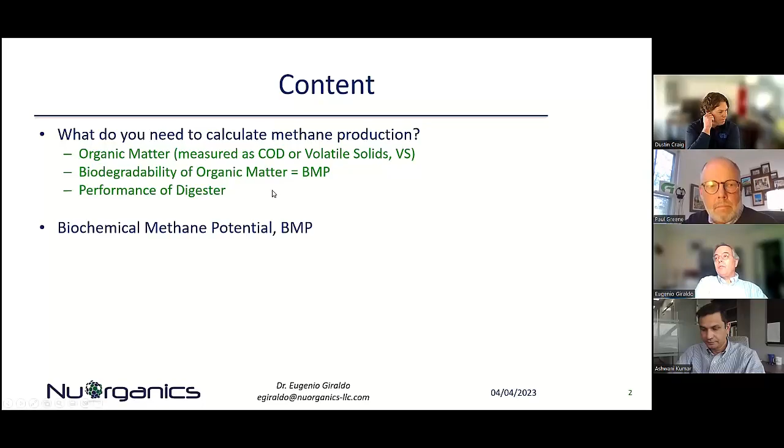You actually need three things: quantification of how much organic matter you have, usually measured as COD or volatile solids; how biodegradable that organic matter is, usually measured as biochemical methane potential, or BMP; and what's the performance of your digester. We'll go over the biochemical methane potential and how we can use it to forecast production, the toxicity assay that's intimately linked to the BMP, and some examples.

The key is to measure that first part, the organic matter, usually through COD or volatile solids. COD has an advantage because there's a perfect link between the amount of methane you produce and the COD that is removed. COD is usually expressed in units of oxygen demand—grams of COD per liter of waste, grams of oxygen per liter, or on a mass basis, grams of oxygen per ton, sometimes called grams of COD per ton. If it's fully degraded, you end up with about 90 to 95% methane and some leftover biomass that grew out of that COD.

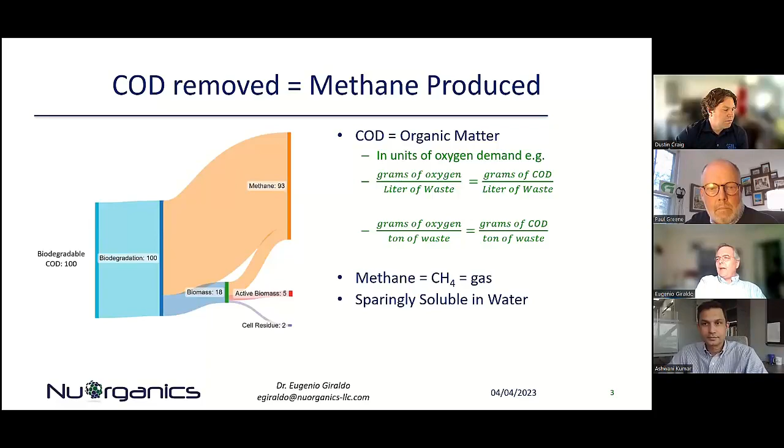Methane is a gas and is marginally soluble in water, so in the digester it bubbles out of the water as biogas—that's how the COD is removed. The interesting part with COD is that you have a very well-defined number: every gram of COD removed produces 0.35 liters of methane, at standard temperature and pressure of 1 bar and 0 degrees centigrade. This is important to understand because since it's a gas, you need to specify pressures and temperatures.

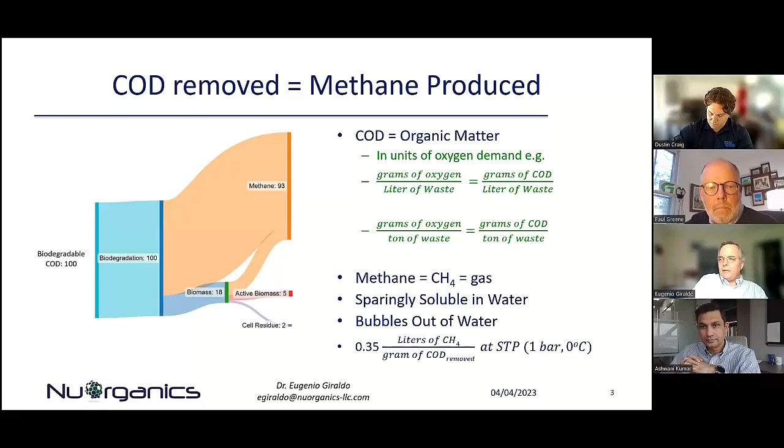The biochemical methane potential basically measures the second part, the anaerobic biodegradability, based on measuring the amount of methane produced linked to the organic matter degraded. It's a test developed at Stanford University originally around the 1970s. This is the classic paper in the industry describing how to conduct a BMP. Later, ASTM took that same technique and, with the experience of many practitioners, put together an ASTM test method actually called anaerobic biodegradation potential, which clearly links the importance of BMP to defining how biodegradable that organic matter is.

It's conducted under strict anaerobic conditions, not limited by nutrients—you add all the nutrients the microorganisms might need. It's not about toxicity; if there is toxicity, you have to relieve it or run the test for a long period until the toxicity is handled. All of this is spelled out in both test methods. It's under pH control conditions, so pH is tightly regulated and you don't have the pH issues you usually have in digesters. It's temperature controlled, giving a very stable environment for the microorganisms, and you use a broad spectrum inoculum, meaning organisms able to degrade your substrate, obtained through strict procedures.

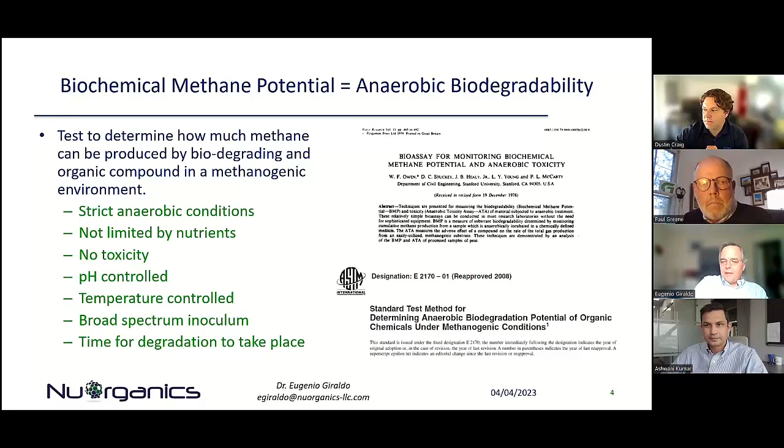This is how you conduct it. You first start by making the conditions anaerobic. These are usually what we call serum bottles, about 250 milliliters. You flush the head space to remove any oxygen, using a gas specified between 50 to 70% carbon dioxide to nitrogen. And then you close it after you flush all the head space to remove the oxygen.

You incubate it, and usually it doesn't call for mixing, but it is better to mix under temperature control conditions. Then you measure the amount of biogas that you produce. The original test called for a syringe, and you pull out that biogas, then calculate the amount of methane that is in it, and plot that over time. This is the original test method.

These days you have at least 2 or 3 different manufacturers that provide automatic measurement of biogas production, and here's one example of them, so you don't have to do it manually. What you obtain is a plot of incubation time versus the amount of methane produced, already on a yield basis.

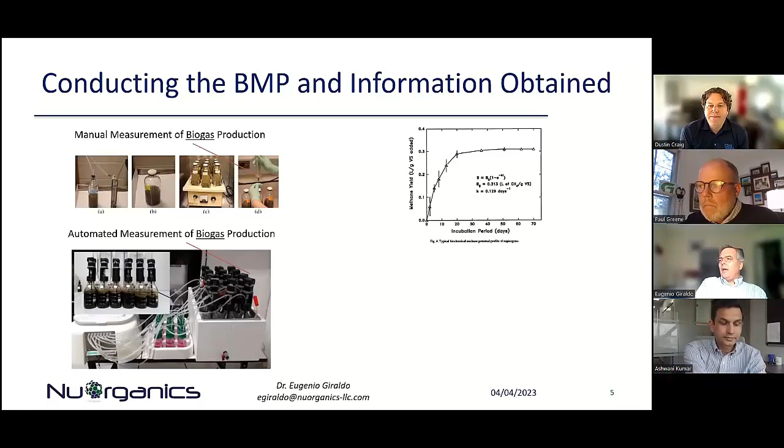The methane per gram of volatile solids added, or gram of COD added. Each one of these dots represents one of the measurements, and eventually it tapers off and doesn't produce any more biogas. In this case it lasts 70 days. You could see that about 20 days it's already tapering off, and you could have pretty much, in this case, about 300 milliliters per gram of volatile solids added. The numbers vary between 200 and 600 in general.

One obtains that ultimate yield in terms of methane. And if you do it in terms of COD, liters of CH4 per gram of COD, because COD has that 1-to-1 relationship of 0.35 - say you got 0.3, and theoretically you had 0.35, if all the COD that you added was converted, then you would have a 90% biodegradability. So doing it in terms of COD gives you an assessment of that biodegradability on a percentage basis.

You also get a coefficient of kinetics that some people find useful. Depending how fast this degradation takes place, you could find and fit it to this equation, and for modelers and for operations this might be a useful parameter - some people find it useful.

In order to use the BMP to forecast, we'll go over how the BMP is conducted and how the conditions in a digester compare to that, which will inform us a bit of the differences. First is nutrient limitations - there's none in the BMP test, but in the digester you might have some in some cases. Sometimes vitamins or trace metals like cobalt might be limiting, so some companies actually sell a combination of substrates that you could add just to make sure you don't have any limitations in your digester.

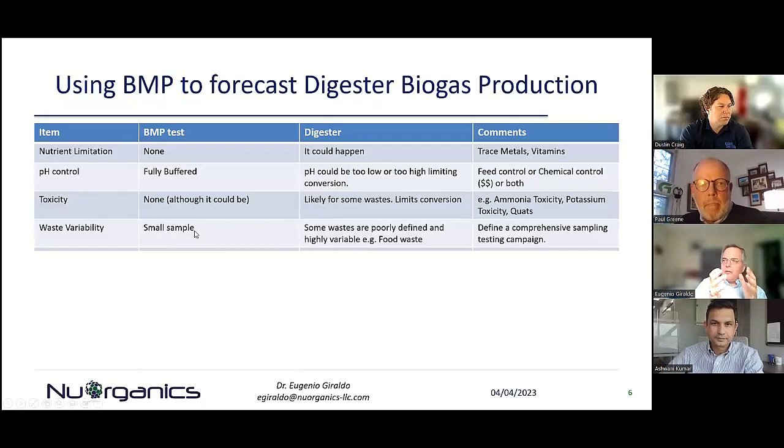There's also waste variability. We conduct this in very small samples, 250 milliliters. It's hard to get a representative sample, especially when you have something as poorly defined as food waste, for example. It has a lot of different components, and you'd have to take something very small and put it in a small bottle. So it could be a challenge, and you would need to define comprehensive sampling and testing campaigns to have representative values.

Some waste might have sulfate, especially industrial waste. Sulfate would produce hydrogen sulfide in your reactor, which decreases the amount of methane produced, and also creates toxicity and other problems in biogas upgrading. So you really need to address this if you have a significant amount of sulfate.

In co-digestion, usually you test only one sample at a time, but it could be multiple substrates tested depending on your campaign and piloting. You could have antagonistic and synergistic effects. I think later on, other colleagues will talk about some of those effects.

You basically have an inoculum that's fully acclimated. Sometimes, depending on your waste, the inoculum used in the BMP might not be fully acclimated, while in your digester, acclimation happens de facto. So it's important for the BMP to be representative, to have an inoculum that is acclimated, or to let that test go long enough to have full degradation.

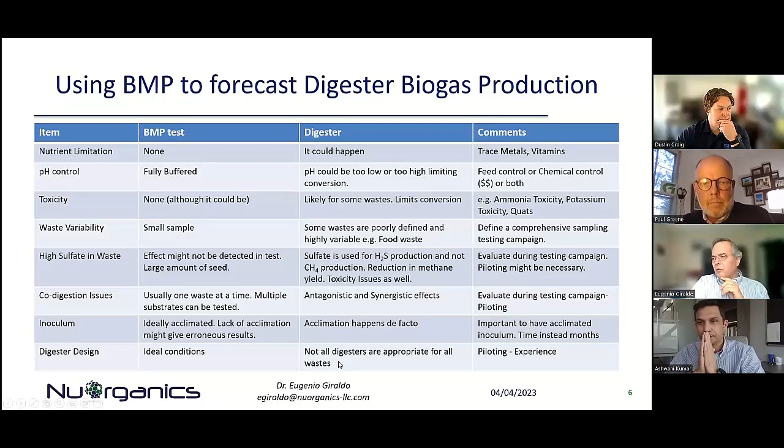In the digester design, in the BMP, we have ideal conditions, but not all digesters are appropriate for all waste. So there's a lot of engineering expertise and piloting required to make sure you'll get full degradation as the BMP says, in your digester.

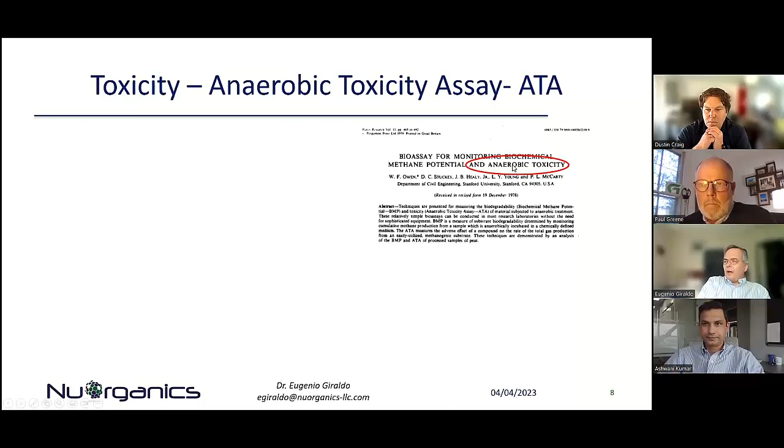And that's where the anaerobic toxicity assay comes about, part of the same 1978 paper from Stanford, Perry McCarty's group. This spells out how to conduct the toxicity assay. It's basically one of the main reasons for not achieving BMP methane yields in your digesters.

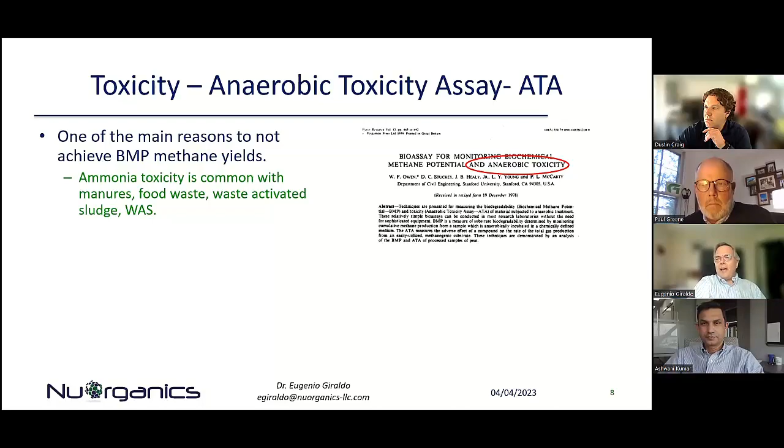In manures and food waste that have a lot of proteins, you might see ammonia toxicity. It's very common, impacts the amount of methane you produce, impacts the digester design. Some digester designs are better to handle high ammonia than others. You might have long acclimation periods necessary. There's a comprehensive list of all the types of toxic compounds that, over the years, people have compiled, so you know what is toxic and at which concentrations.

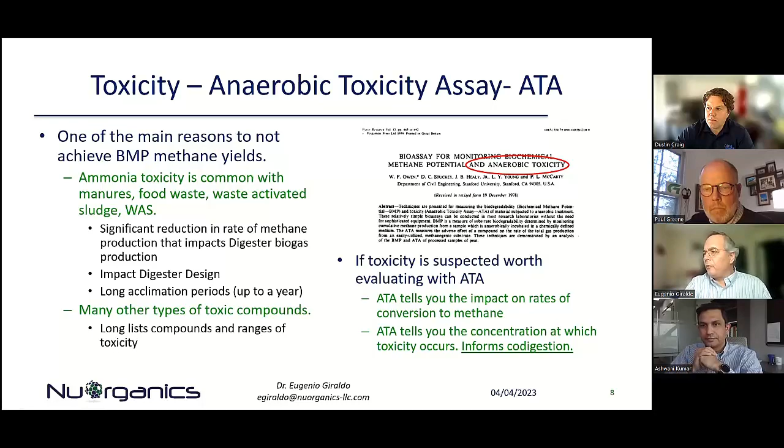If you suspect you have toxicity, it's worth conducting the ATA test. It will give you the impact on your rates, which helps design your digester to handle a reduced rate, and it also informs co-digestion. My colleagues will talk about how, when you combine different substrates, you can actually have synergistic effects by diluting some of that toxicity with co-digestion materials.

Now we move into some examples where people actually measured the BMPs, and then I went to their digesters and looked if the BMP could actually predict performance. The references are all in the back for you to look at carefully later.

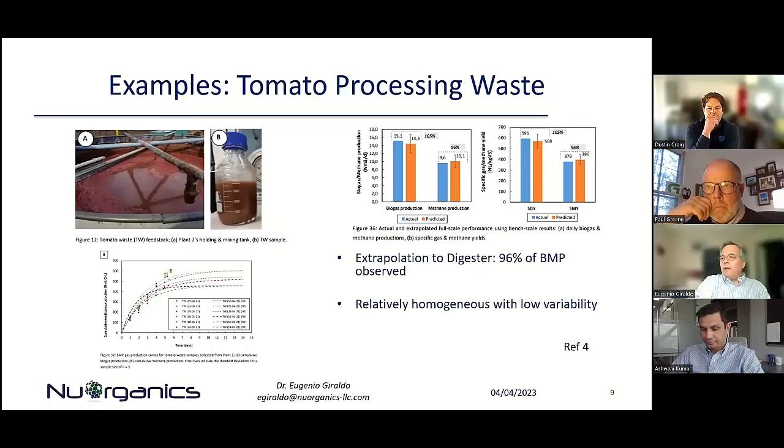This one is a tomato processing waste. They conducted the BMPs, used them to forecast the amount of methane produced, and found about 96% of that predicted methane yield was observed in the digester. This is a relatively homogeneous waste with low variability, so you have good conditions with no problems.

Then they took a dynamic model and produced this type of example. What you see shaded here is the predicted BMP using the dynamic model, and what you see in darker is the amount of methane that was actually measured.

You'll see high variability, ups and downs, typical of digester performance. This is measured in weeks, so this is about six months worth of data. You can see that the majority of the time, the BMP prediction is above what they actually measured. This graph underneath shows that difference, and when the BMP is high and the prediction is low, you'll have the highest difference.

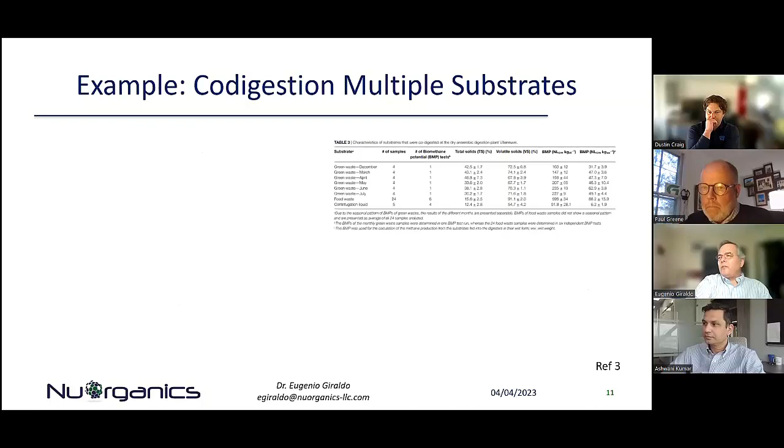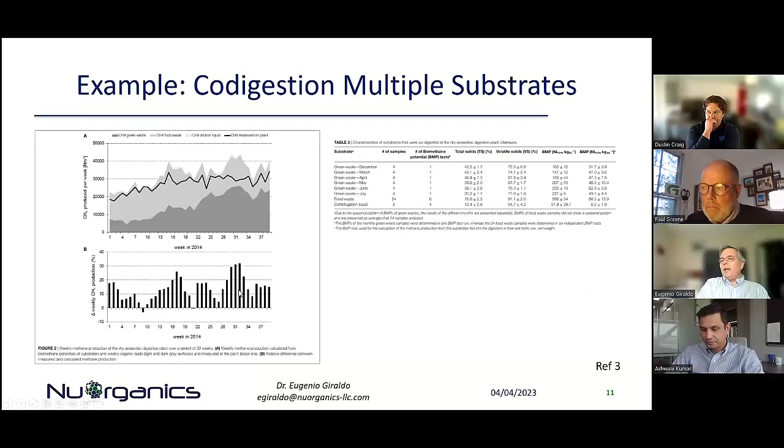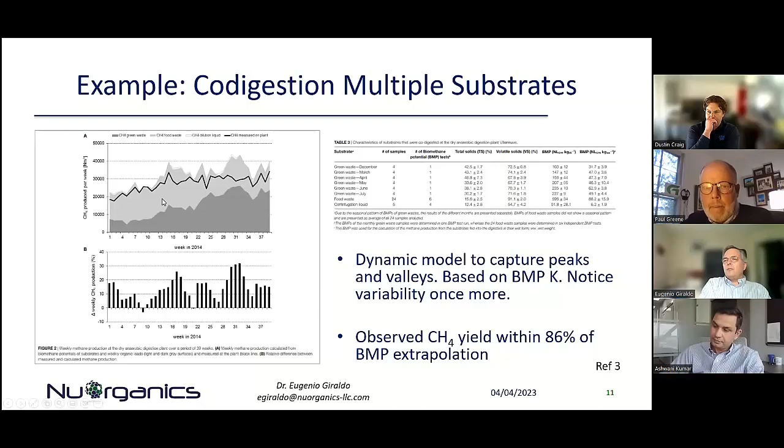Second example, same group, but in this case was just green waste and food waste, same type of graph. But here the difference between the BMP and the actual measurement was significantly higher. If you average these out, you'll find about 86% of the extrapolated BMP was actually measured as biogas in that digester.

And finally, some University of Iowa and Cornell examples. They took 6 different digesters doing dairy digestion. They have plug flow and CSTR digesters, and some have co-digestion, some were just straight dairy. They looked at BMPs and looked at the actual measurement.

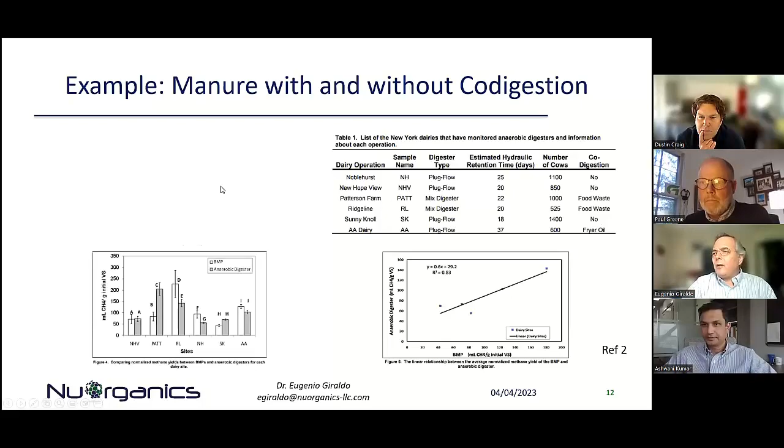Those are the graphs you see here. The BMP is in light, the digester number is dark, and they put it in a graph comparing the BMP on one end with the digester on the other. If you average this out, they found again about 90% of the expected yield from the BMP in the digester.

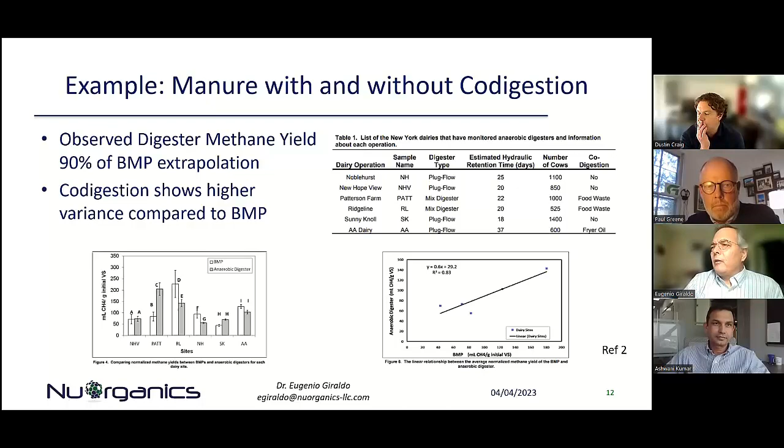In some cases, the actual number you saw in the digester—this case, PATT, Patterson Farms, a food waste co-digestion—they actually saw more biogas being produced in the digester than the BMP predicted. That happens sometimes. It shows high variability, part of those synergistic effects when you co-digest.

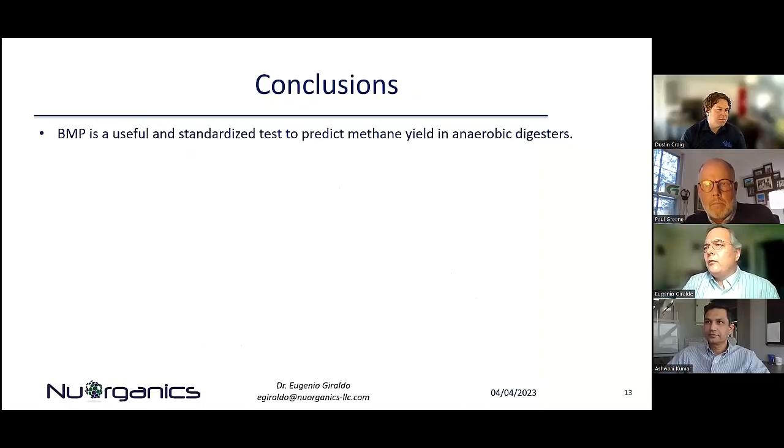As a summary, we conclude the BMP is a standardized test. There's an ASTM that spells out exactly how it should be conducted. There's a lot of experience on how to do this test. There are toxicity effects you need to be aware of, and the conditions in digestion are not as controlled as in BMP. If you have toxicity, you should be careful with it, as it limits the amount of biogas you produce. If you don't have toxicity or overloads, you would expect about 90% of the BMP.

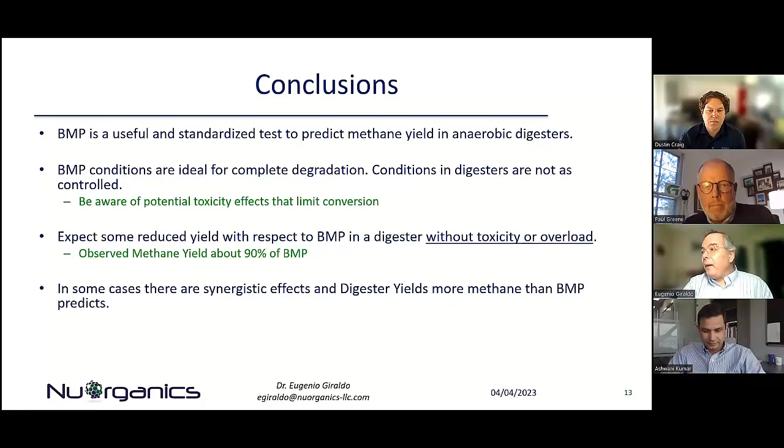In some cases there are synergistic effects, and you actually see higher yields than the BMP predicts. And finally, biogas production in the digester is dynamic, subject to a lot of variability, and short-term studies for a day or a week, even a few weeks, might give confusing results. You need a longer period of time to average out all those peaks and valleys and have good numbers.

And with that, I conclude. Thank you. Thank you, Eugenio, appreciate that—BMP is certainly a powerful tool in this space.

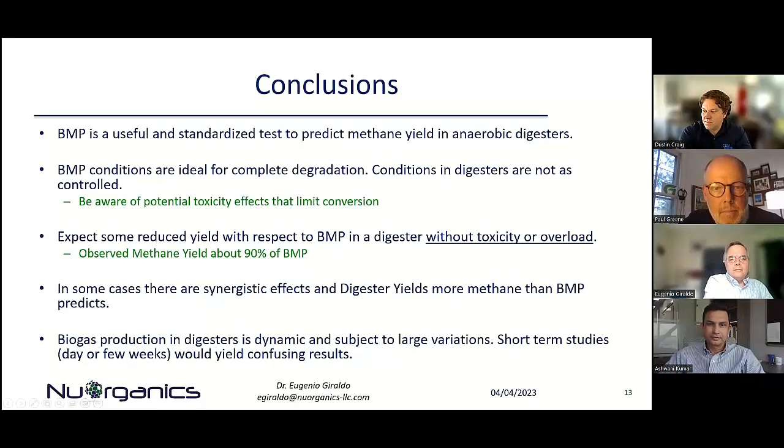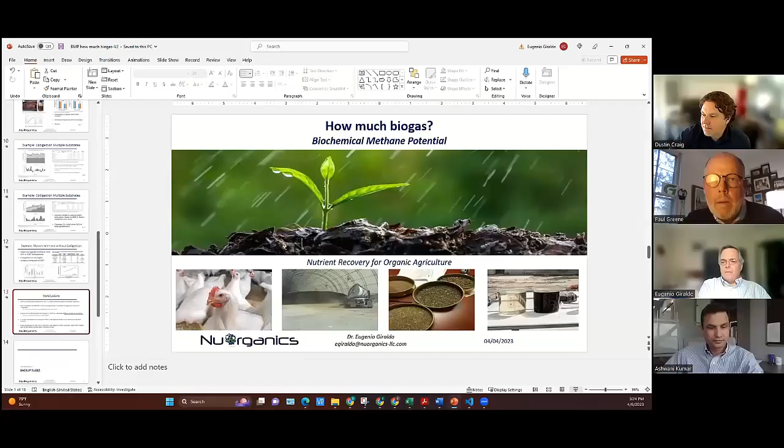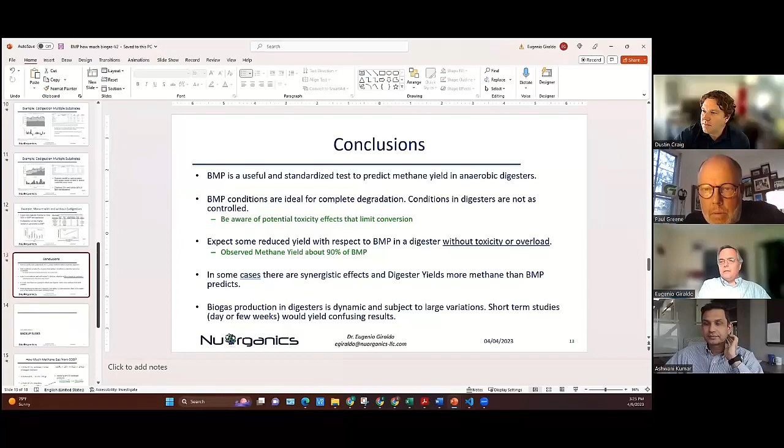So I'm going to say a couple things here, if I can do this right... No, that's not right. You need to stop sharing, Eugenio. Okay, make sure I do that. How do I do that? Okay. Oh, here's—you see my screen, Eugenio? Yeah, yeah, okay.

Got it, okay, sorry. Okay, so a few kernels of wisdom to share here. So again, I'm Paul Greene, and thanks everybody for joining.

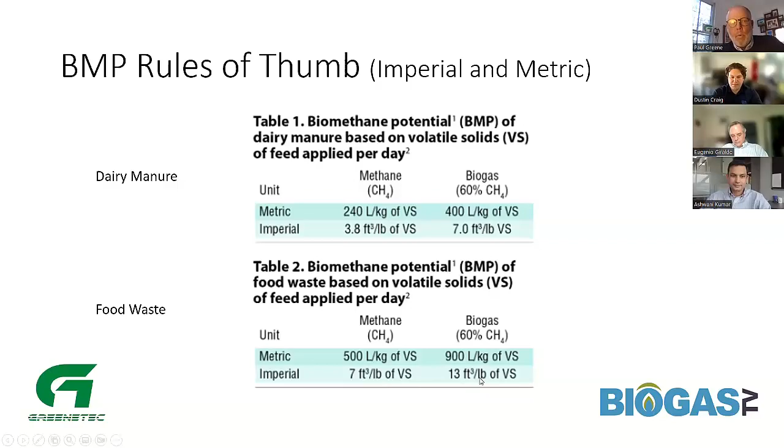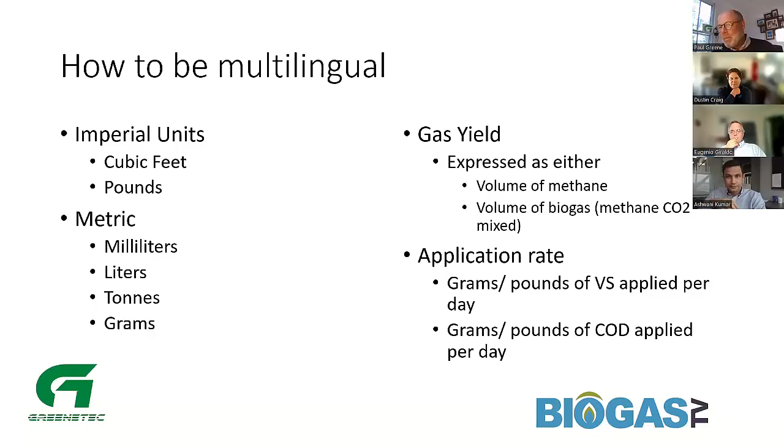And the application rate, you're going to have either pounds of volatile solids applied per day, or grams or pounds of COD applied per day. So being able to be multilingual, we speak about volatile solids, we speak about COD as well.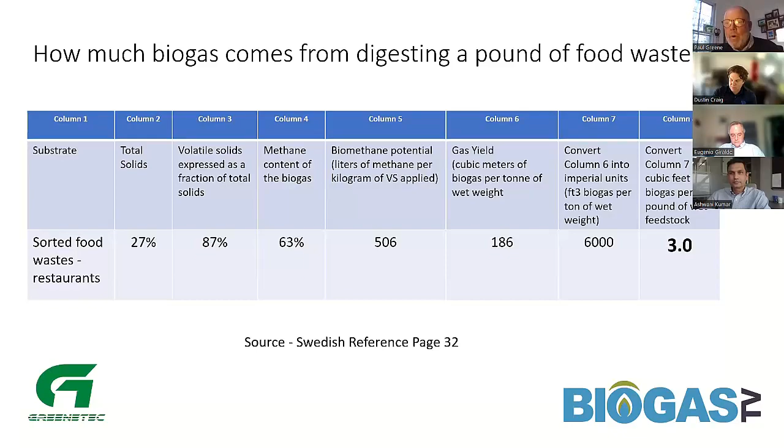So I think of a developer that was talking to me the other day. Paul, I've got 100 tons of food waste a day, how much gas is that going to make me? Well, so here's a good number for you: if you've got a pound of wet feedstock, somewhere around 3 cubic feet of biogas will be your gas yield. So says the Swedish reference.

So what tools do we have in our toolbox to talk about our feed and our digester? Volatile solids, VS, total solids, TS. So TS, you dry your material at 220 Fahrenheit, so it's simply drying. But your VS test, you're really cooking it at 1,000 Fahrenheit, burning it down to an ash. So these graphs here: if you had a sample with this total weight, your total solids would be this smaller bar, your volatile solids will be that even smaller bar. And so this is the VS.

This can make gas, but not all of it will make gas, because the more challenging solids like cellulose in there—things like in dairy manure, seeing some of the cellulose in that—this is where this area enters the world of imperfection, right? So this component, VS, in theory can make gas, but the cellulose needs more time to convert than just the 25 days of a typical digester.

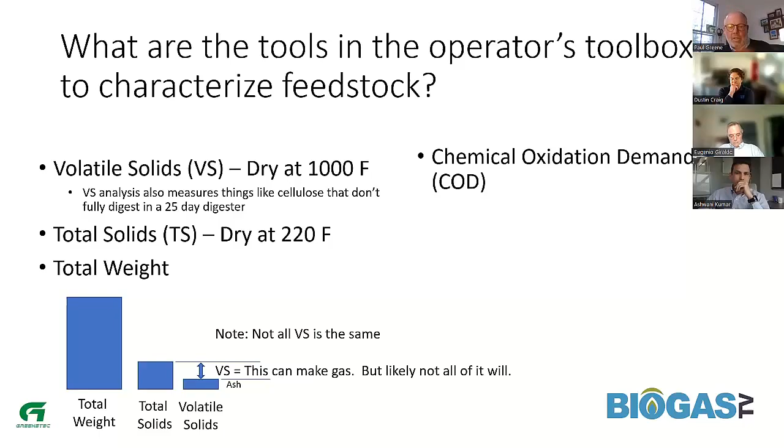There's also this concept of maximum theoretical gas yield. So Eugenio mentioned 0.35 on COD. So 1 pound of COD converted, to get that over to imperial units, is about 6 cubic feet of methane. As Eugenio reported, in metric, a kilo of COD converted is 0.35 cubic meters of methane created. And so that is all based on stoichiometry, ideal gas behavior, knowing the molecular weights.

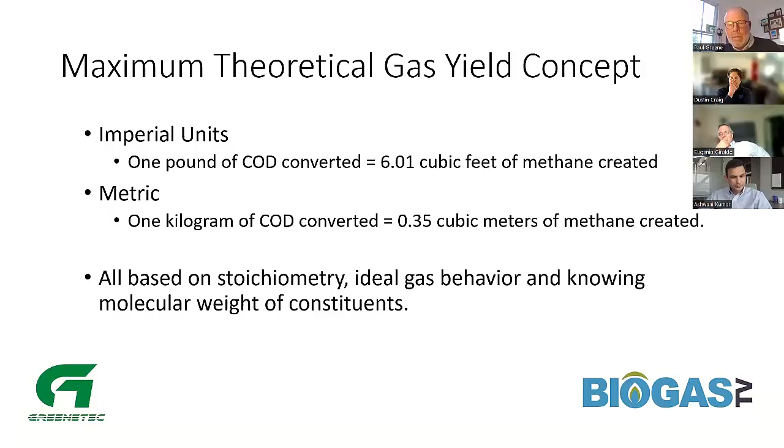And once you convert that amount of carbon to methane, those are your theoretical maximums. So you're never going to physically be able to make more gas than that—you're always going to be somewhat less than that. So there you have it.

There are always different stages of a project when we develop it: a feasibility stage, a development stage, execution and operation stage. So when you're in project feasibility or early stages of evaluation, there are ways to theoretically estimate, before a project is considered for serious resource allocation, the order of magnitude amount of biogas that can be produced from a typical substrate. We can do desktop projections based on the feedstock mix or composition.

Typically, every feedstock can be broken down into carbohydrates, fats, and protein as a percentage component. Since anaerobic microorganisms during anaerobic decomposition use a very small amount of energy for their own growth—because the anaerobic process doesn't generate as much sludge as the aerobic process does—we will assume there is no reaction biokinetics loss in it.

Based on some tests and research papers published globally, I've pasted a table here in this slide which gives us a fairly good indication of how much biogas can be formed. But please note, this is not a gospel truth. In general, carbohydrates have higher BMP because they are readily biodegradable, but there are different kinds of carbohydrates. For example, the BMP or biomethane potential of glucose, a very simple carbohydrate, is as high as 630 to 690 meter cube of methane per kg of volatile solids decomposed.

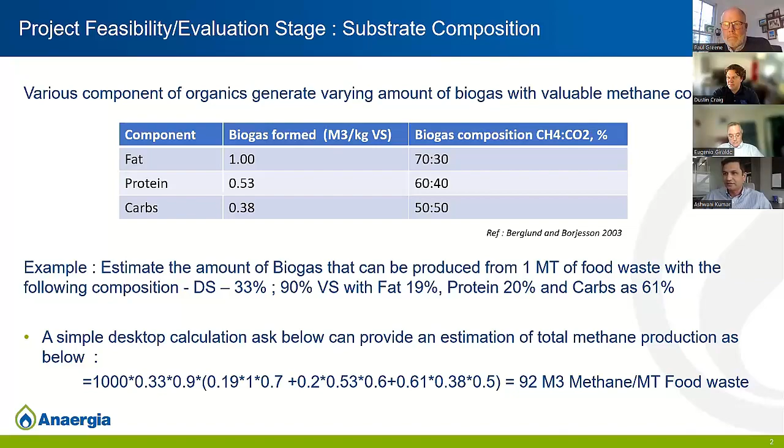Similarly, fats typically have the most methane and energy content, but we always have to be very cautious about how we dose fat in a digester and what percentage of the overall composition is the fat component. I've also published here a very simple calculation on how you can estimate the amount of biogas you can produce from a ton of food waste with some constants. I'm sure this slide will be available in the video, so we can go through it.

During the project development stage—and we've already talked about BMP, or biochemical methane potential—this is a validation test for a feedstock. It gives us a more accurate method to evaluate the amount of biogas a feedstock can generate. But there's a lot of confusion around BMP: you send the same sample to different labs and you get different BMP results. Sometimes different samples collected from the same feedstock in different seasons or of different age also give different BMPs. There's a lot of discussion around it, but there are a couple of reasons for these variances, and we have to understand them as design engineers—what are those variances and why are they coming our way?

BMP obviously needs a set of skills to prepare the assay bottles and identify the right kind of media. It's done in a very controlled environment of a lab. We also make sure we're controlling all kinds of toxicity, dosing the right pH, and adding the right nutrients and micronutrients. That may not happen in a real scale plant, and we have to be very aware of this.

Some labs also use internally cultivated seed, inoculum, or biomass. There's always a risk that the seed inoculum may not be exactly conducive to the kind of inoculum we're looking for, so we always have to watch out for this.

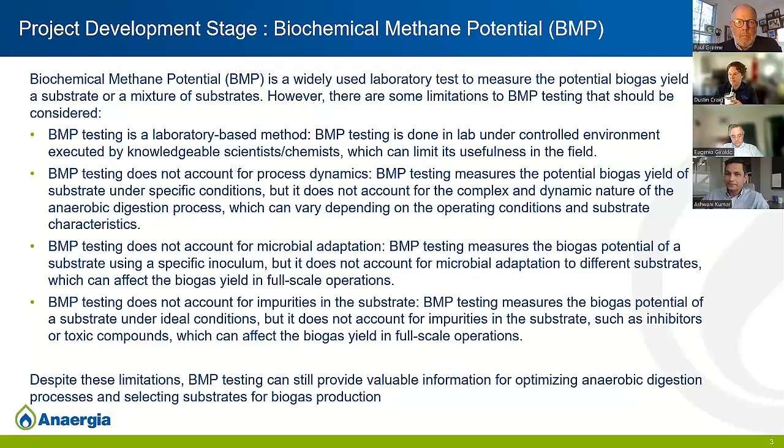During the project financing stage, this is where we need to be very, very accurate. This is where a couple of things come together, like different tributaries coming to form a river. There is an empirical model based on characterization of feedstock. We know the organic content by measuring total solids and volatile solids. We know its pH, nutrient composition, and source. Based on all this, we can estimate the biogas generation potential.

These models often use a couple of lab experiments and feed samples. You need some site walks to be done, followed by benchtop studies—BMP is typically a benchtop test. Most technology providers develop very reliable models to estimate biogas, built from years of data collection and experience. Once we have data from different plants, we put all that experience into simple tables and formats, and we get validation from a benchtop study or a small pilot study.

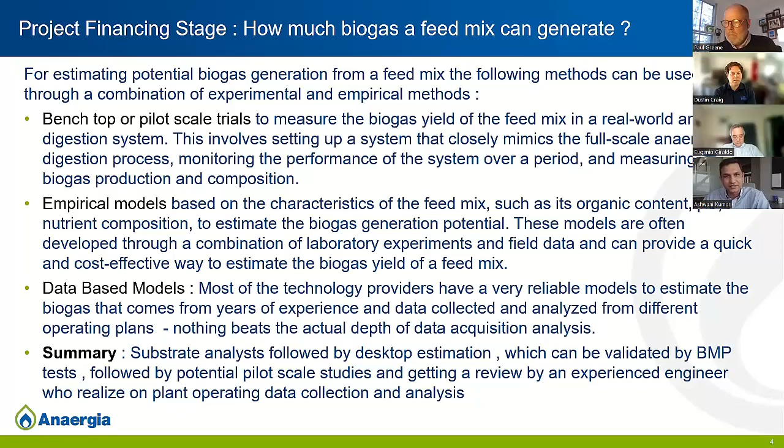All this comes together: we start with substrate analysis, do some desktop estimation, validate the BMPs, and try a pilot if possible. We also get all these tests reviewed by an experienced engineer who has operating experience and the luxury of a database from different years of operating different plants. That's how ultimately it comes to a conclusion.

Co-digestion improves biogas generation—there are synergetic effects of co-digestion, and a lot of studies published on this. The theme is: there is a theoretical BMP, say for biosolids, and a theoretical BMP for fat, oil, and grease. But if you combine the two and co-digest them, the net biogas generated will be more than the arithmetic addition of these two BMPs. The reason is co-digestion brings in different kinds of microorganisms that are more resistant and more compatible to different feedstocks.

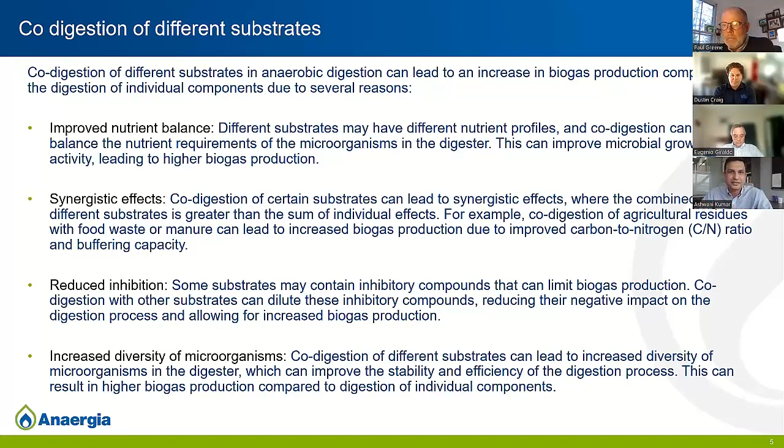Operations are important. We can get BMPs in the lab, but once the plant is operational, the amount of biogas we can recover depends on a plethora of variables and factors. It can be as simple as whether the feed is fresh—are all the volatile solids available to decompose, or is it aged and sitting outside, losing degradable VS? Seasonality plays a major role—during holiday periods, for example, we often get feedstock rich in proteins on food waste digesters.

There are also factors such as digester operations—pH, temperature, alkalinity, nutrients. Are we sticking to the right feed regimen? Are we feeding or starving the digesters, feeding everything in batches? There's different ways to consider partial pressure. Are we feeding too much fat, oil, and grease? What is the right residence time? Are we maintaining the right temperature?

There are several operational parameters and factors that affect biogas recovery in anaerobic digesters, including organic loading rates, hydraulic residence times, temperature, and pH. Nutrients are an important factor and most often ignored. Compared to our nutrient requirements for anaerobic digesters, typically for nitrogen, phosphorus, and sulfur, the ratio is 10:2:1.

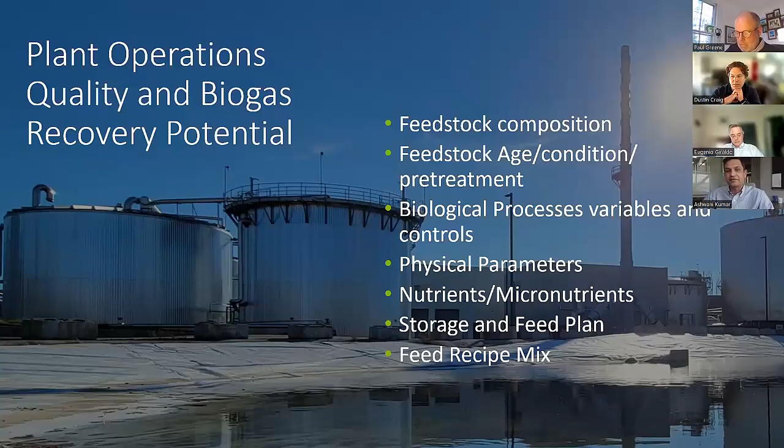That's a thumb rule I normally use for every 100 milligrams of biomass, because that's where it is used. If you want to go on a more concentration basis, typically it's 50 to 10 to 5 milligrams per liter. On the micronutrient side, ferrous, cobalt, nickel—and sometimes zinc—are key components that we have to test and add. We also have to make sure all the mixers and digesters maintain the right kind of agitation required in the digester.

Inhibiting substances, I think this has been talked at length, but let me tell you why this is important. We have to watch out for ammonia, which comes from protein sources and can be fairly toxic. Similarly, we watch out for sulfur in the digesters, but one thing we always watch out for is the volatile fatty acids—basically acetic acid, propionic acid, and butyric acid. We want this to be in the range of 60:20:20, or even better, 70:15:15. As we see the acetic acid ratio reducing, we know the digester is moving in the wrong direction. VFAs are the first indication of whether the digester is healthy or not, and we have to keep an eye on it for maximizing our biogas recovery or maintaining it as close as possible to our BMP values.

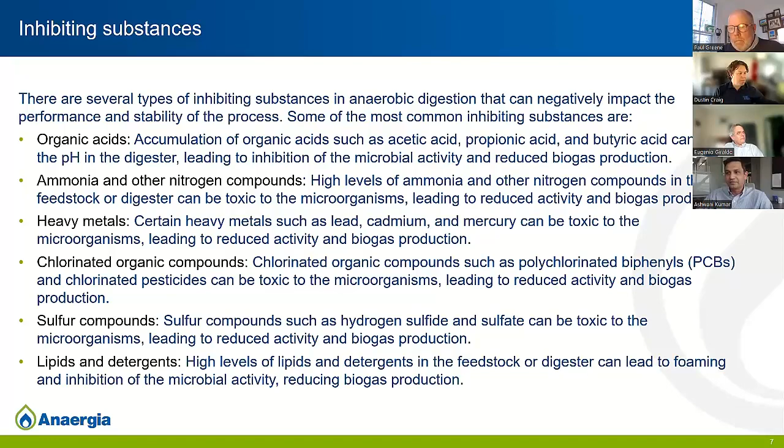I think we can read through the rest otherwise. You have my phone and email—just in case you have any questions, don't hesitate to reach out to me. Thank you.

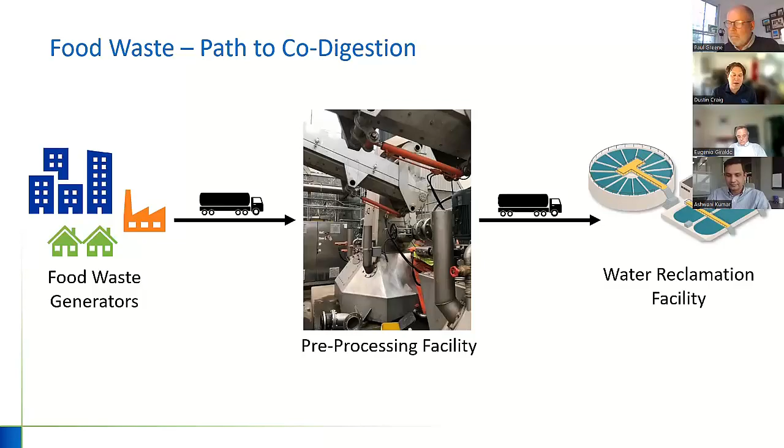The first is the Greater Lawrence Sanitary District. But before we get to that, here is the most common path to receiving this food waste for municipal facilities. Oftentimes you have food waste generators—cafeterias and so forth—that is source separated and sent to a pre-processing facility, sometimes through a separate stream or sometimes combined and pulled out of the municipal solid waste. It's then processed and trucked to a water reclamation facility. This is the most common method we see for a lot of traditional food waste.

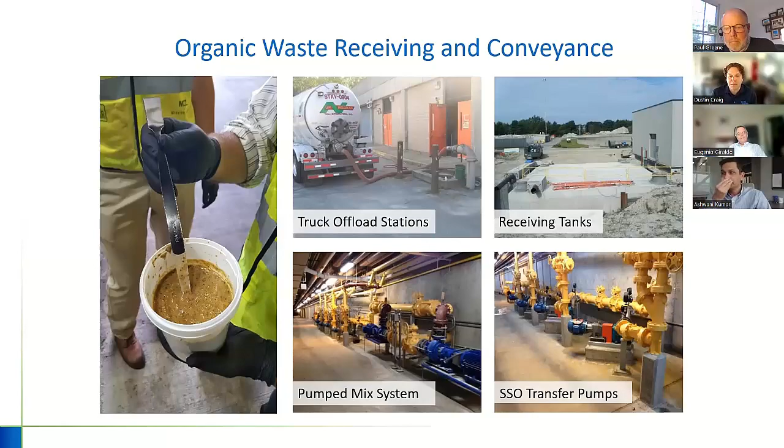Now we want to get to GLSD, Greater Lawrence Sanitary District, a great case study—about a 50 MGD facility in Massachusetts that really has a cutting-edge co-digestion and food waste diversion program. We'll get a little bit into the details here.

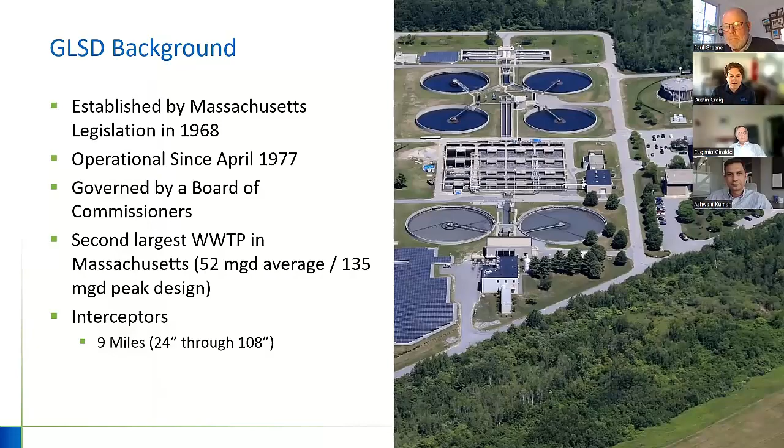Back around the 2014 timeframe, the state of Massachusetts was passing organics diversion legislation, and their landfills were filling up. They knew that all of this food waste was a pretty sizable greenhouse gas emission source—landfills don't do a great job of capturing that gas, and there's always methane leakage. So they started to implement organics diversion, which led to a push to find out where they could take this waste—to composting, or even better, to a digestion facility.

That led the way for an initial feasibility study at the facility to look at how much of this source separated organics they could receive—about 28,000 gallons per day in their existing system. But if they added a fourth digester, they could bump that up significantly and really be a good host for all this organic diversion, achieving the organic diversion legislation goals. And with that addition, of course, you're going to produce a whole lot more energy. So that legislation is what led to this program.

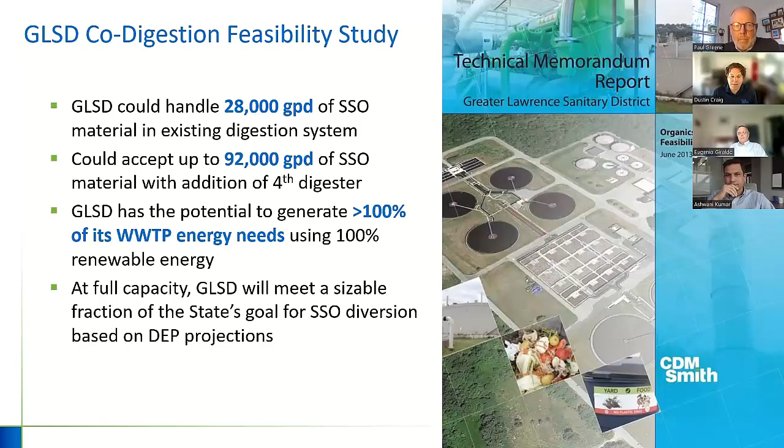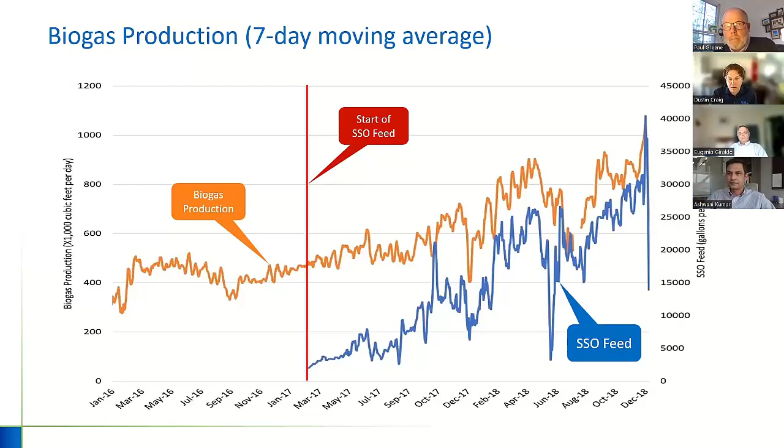So here's the pure data of what that full-scale pilot and full-scale startup operation really looked like on the SSO feed. You can see the biogas production humming along, say 450 SCFM, and then in blue we start to add in our source separated organics. The right axis shows gallons per day fed in, not a tremendous amount from a volume basis, say 20,000 to 25,000 gallons per day. You can see the direct impact that had on overall system gas production, significant increases, which speaks to how volatile this food slurry feedstock was.

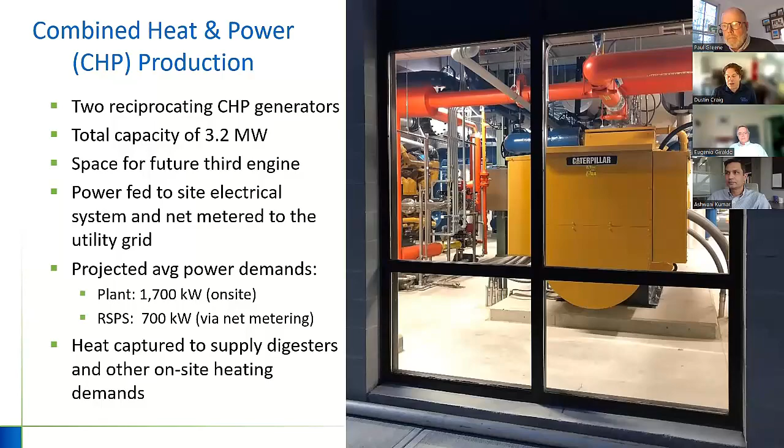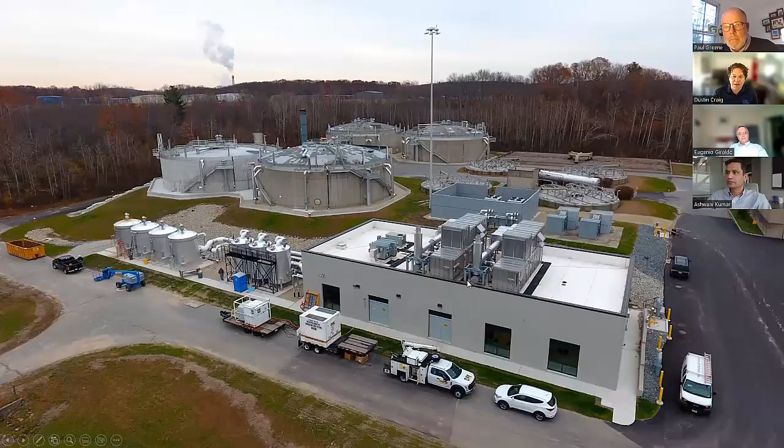A great job with the pointer, Paul. Thank you, Dustin. You know, I'm pretty good at some things.

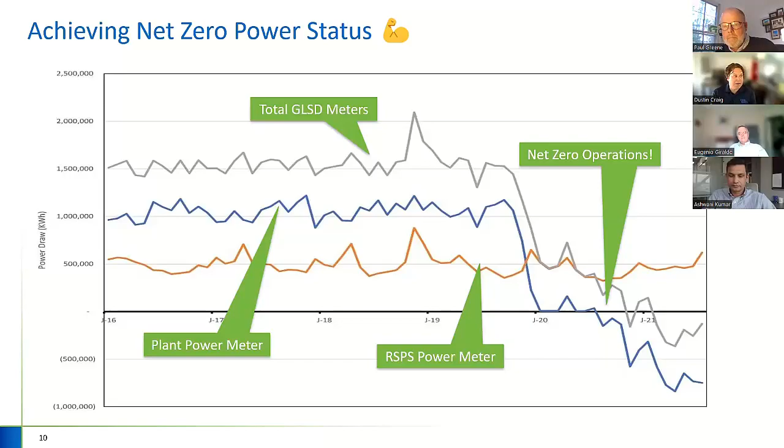Okay, so that's one case study, looking at time here. Moving to the center of the country and the Des Moines Wastewater Reclamation Authority. This is a regional facility serving basically the entire area of Des Moines, and I've had the privilege to work with them for a number of years.

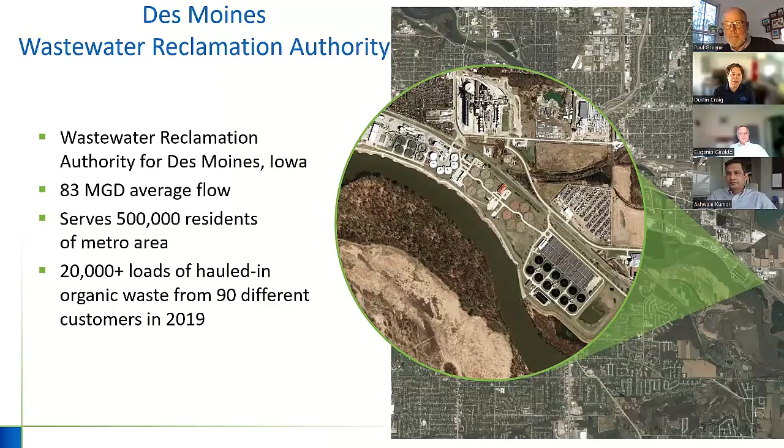This, I'll say, is the second largest co-digestion program in the US on a municipal scale, at least that I know of, behind East Bay MUD. They don't get as much publicity, they have that Midwest modesty and fly under the radar a bit, but they received 20,000-plus loads of hauled-in organic waste from 90 different customers in 2019. That's grown a bit over the last couple of years too - just a significant program they've built up over decades.

It's traditional wastewater treatment, primary and secondary treatment, and naturally anaerobic digestion. The unique aspect is this program where they bring in high strength waste - Iowa is the heartland doing a lot of food processing. So they benefit from having these feedstocks within their collection area and even beyond the entire state of Iowa. They're bringing in about 50% of their total volatile solids loading to the digesters via this high strength hauled waste.

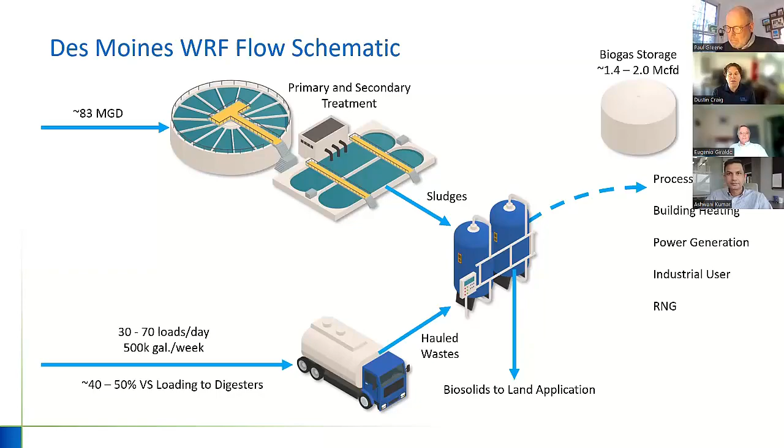And it produces a tremendous amount of biogas. They use that for process heating and building heating. They do have some power generation that is mostly offline - they were selling gas to an industrial user, but they no longer do that. And they've gone all in on renewable natural gas, which we'll get to.

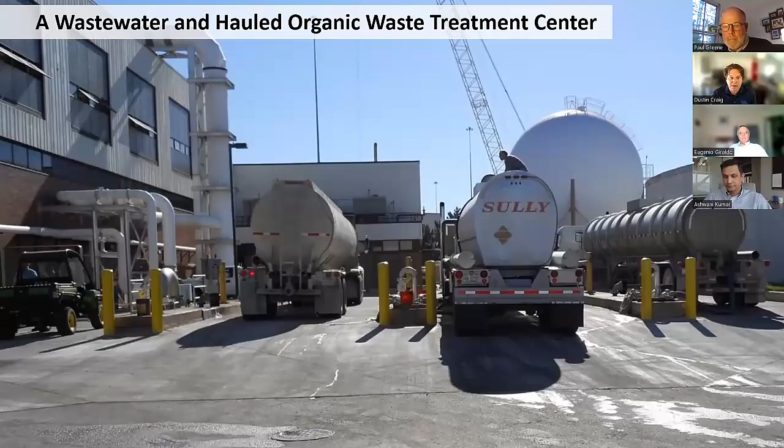So just an example of their organic waste receiving facility. They can receive 3 trucks at a time. They drop down to a below grade tank there that's 140,000 gallons. That tank is well mixed, and then that is slowly bled into the digestion process. So they're receiving 50, 60, 70 trucks per day through this facility. It's a really humming operation coming through here. And there's often a little bit of a line waiting to offload some waste.

So the first phase of this project goes back quite a ways to 2009 to 2014, and we really took those digesters and fixed some of the issues they had with handling all this high-strength waste. We put new submerged fixed concrete covers on them. They kind of mimic the operation of an egg-shaped digester in the traditional pancake style configuration, so a little bit better scum and foam control. New mixing, new gas conveyance. We improved that hauled waste receiving facility that we saw in the last picture. And the overall goal is really to design a more resilient process and facility to handle this tremendous amount of hauled waste and the high amount of biogas that it was producing.

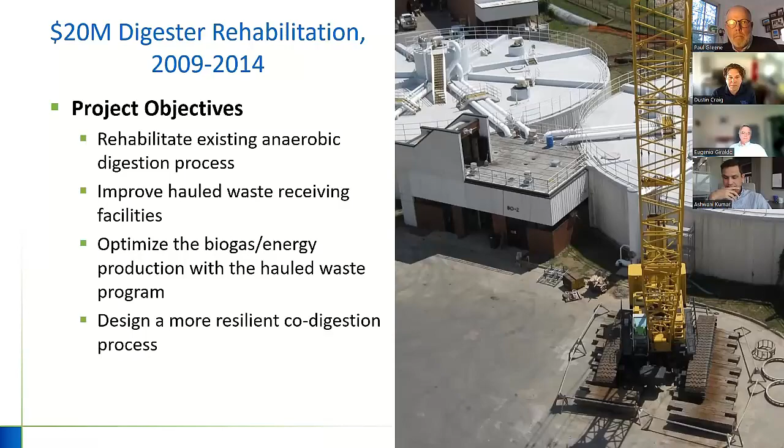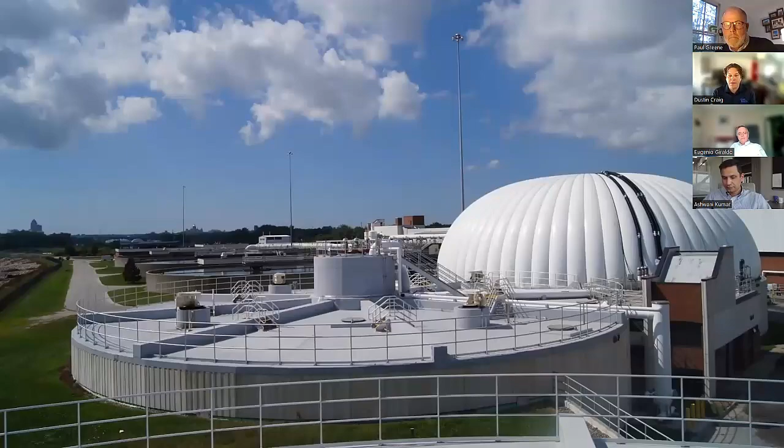Next slide. And here's just a picture of that finished submerged fixed concrete cover. On 5 of the primaries, we are running that gas membrane digester there as a secondary digester, a little wide spot in the line for both the biogas system and the sludge level fluctuations there for dewatering. But they have a tremendous amount of digestion capacity. Each of these tanks is about 3 million gallons. So big digesters, and they receive a whole lot of outside waste to those.

Uh-oh. Yeah, what's going on here? It's running away from you. There we go. You here? There we go. Perfect.

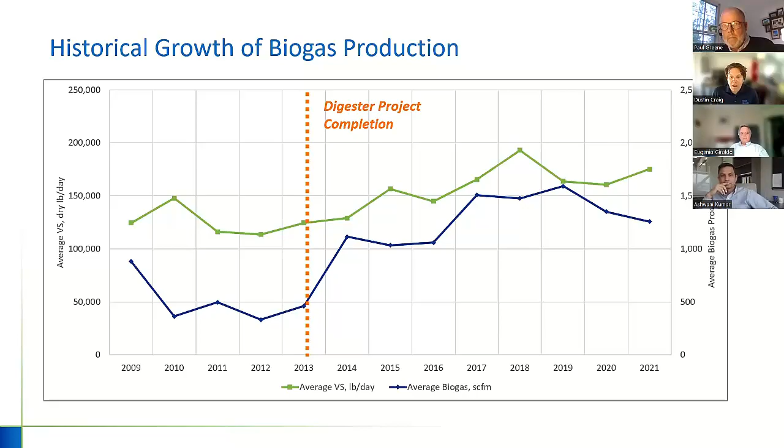That created a new problem, which they started flaring gas again. So they got their digester process up and running and producing more gas, and then they only turn around and flare more gas, which everybody hates. Nobody likes to burn that biogas. So that led to the next phase of the project, which was a renewable natural gas project. And we installed a 2250 SCFM capacity pressure swing adsorption system here. And what we were doing, of course, is to optimize the production of this biogas, create RNG, put it in the pipeline, and get some return on our investment. So it is generating about $6.5 million a year in gross revenue right now through that.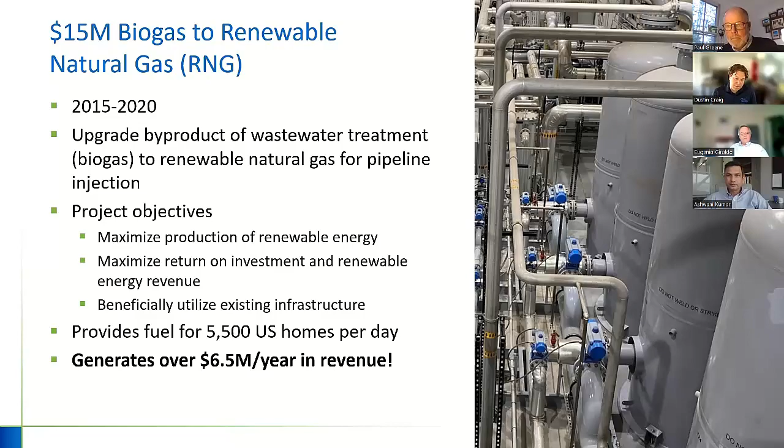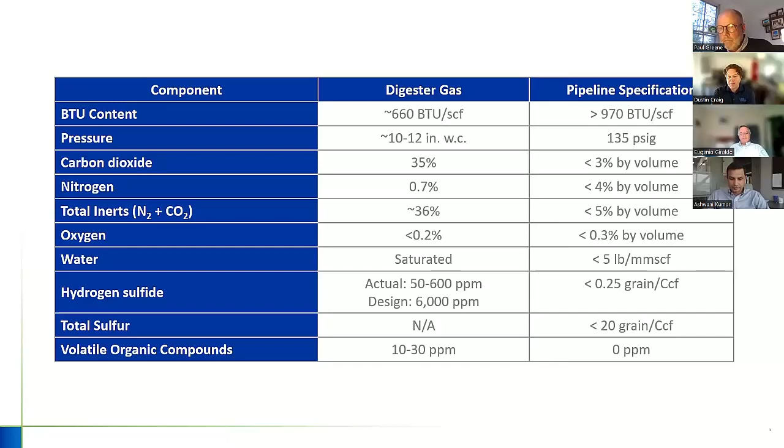A little bit on the pipeline spec versus the digester gas. We had a great pipeline spec. I think sometimes not everybody is as beneficial of this. That 0.3% oxygen is nice, and we've never had any issues with that. We've been very low on oxygen, but it's nice to have a little breathing room on your oxygen criteria, because a PSA system and most gas processing systems don't do much to remove oxygen. Other than that, we've had no problems meeting those pipeline requirements.

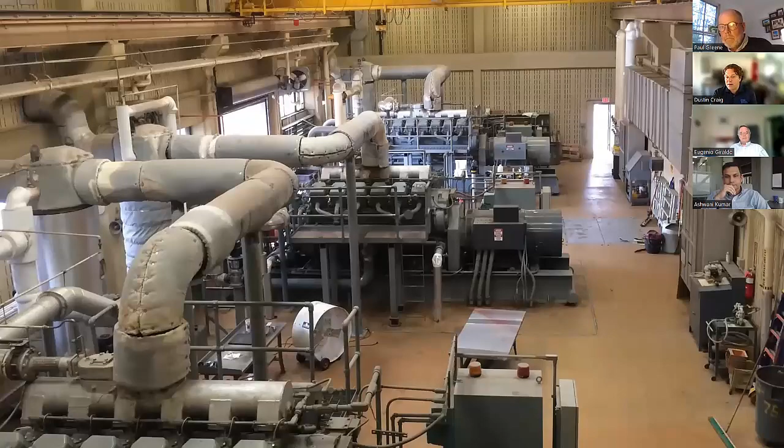Little pictures of the site. These cogen engines had reached the end of their useful life, and we needed this space, so we cleared them out.

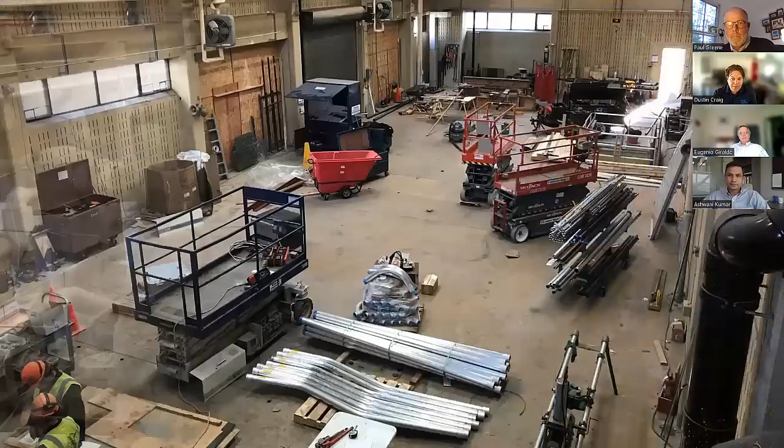Next picture. So we had to do some extensive modifications in this room, tear everything up, cut holes in the wall, make it explosion proof for class 1 div 1 for the gas processing system.

So the wrap up of this is this is a very successful co-digestion program, and it's been built over decades and decades through WRA's vision. They're receiving quite a bit of money just from organic waste tipping fees of receiving this waste. Then they're turning around and producing renewable energy and generating more money off of that. Payback for this system is tracking, it's actually under 4 to 5 years is the latest numbers I've seen. And they've got a lot of good publicity.

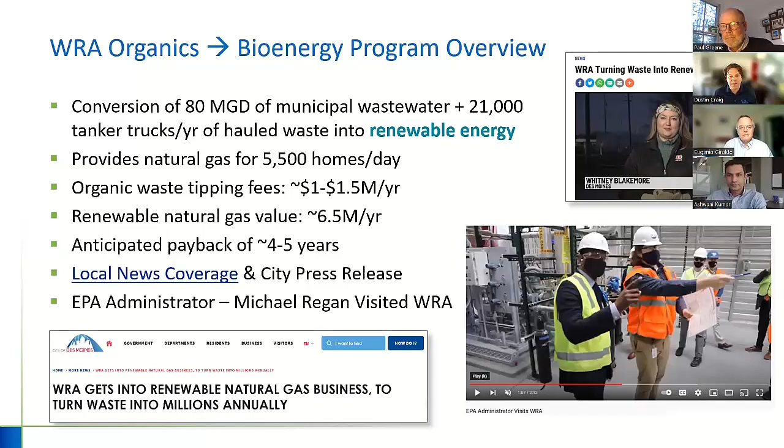And actually, it was really cool. The EPA administrator, Michael Regan, visited the site about a year and a half ago and took a tour just to see what all they're going on during COVID times. You can see with the masks. So all in all, great project. And really an example of what co-digestion can do at a very large scale.